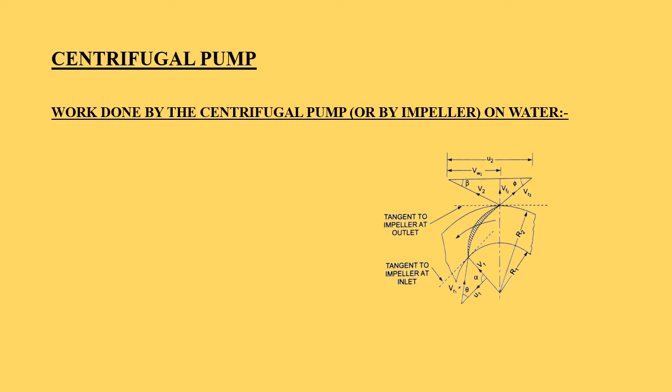In centrifugal pump, work is done by impeller on water. In the figure, N is the speed of impeller in RPM, and D1 is the diameter of impeller at inlet.

U1 is the tangential velocity of impeller at inlet, which is equal to pi D1 N by 60. D2 is the diameter of impeller at the outlet.

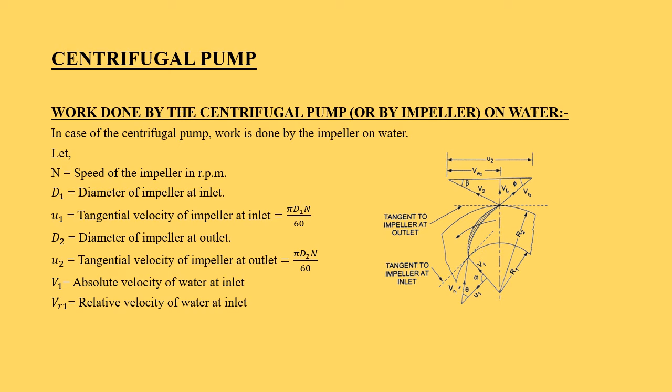U2 is the tangential velocity of impeller at the outlet, equal to pi D2 N by 60. V1 is the absolute velocity of water at inlet, VR1 is the relative velocity of water at inlet. Alpha is the angle made by V1 at inlet with the direction of motion of the vane, and Theta is the angle made by VR1 at inlet with the direction of motion of the vane. V2, VR2, beta, phi are the corresponding values at the outlet.

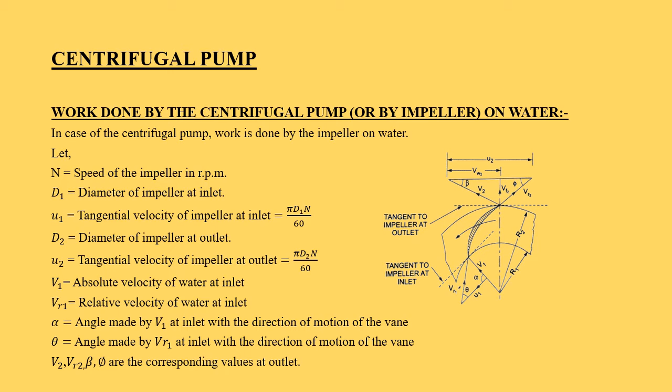In centrifugal pump, water enters the impeller radially at inlet. That is, the absolute velocity of water at the inlet makes an angle of 90 degrees with the direction of motion of the impeller. The work done by the impeller on the water per second per unit weight of water striking per second is

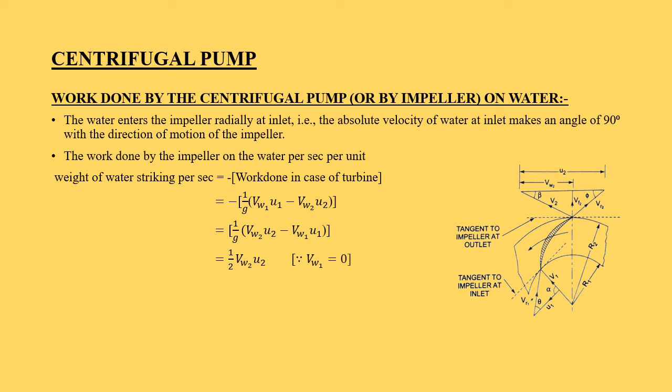equal to minus the work done in case of turbine. So we can write that as minus 1 by G, Vw1 U1 minus Vw2 U2. By rewriting the equation, we can write it as 1 by G, Vw2 U2 minus Vw1 U1, which is equal to 1 by G, Vw2 U2, since Vw1 is equal to 0.

Work done by the impeller on water per second is equal to W by G, Vw2 into U2, where W is the weight of water, which is equal to rho G into Q, where Q is the volume of water, which is equal to area into velocity of flow.

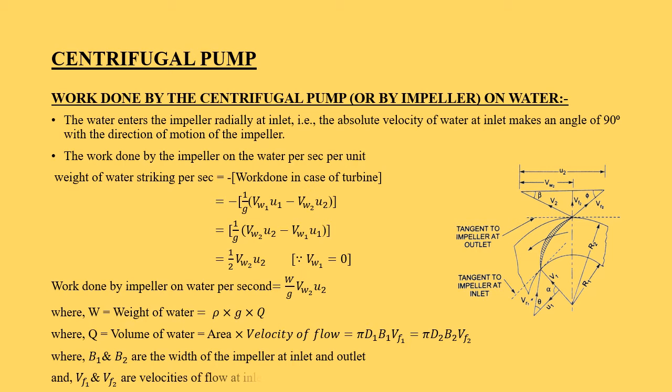So instead of area, we can write pi d1 b1, and instead of velocity of flow, we can write vf1. So the equation becomes pi d1 b1 into vf1, which is equal to pi d2 b2 into vf2, where b1 and b2 are the width of impeller at inlet and outlet, and vf1 and vf2 are the velocities of flow at inlet and outlet.

Suction head of a centrifugal pump is the head required to cause the suction of a liquid from the sump to the impeller through a given suction lift.

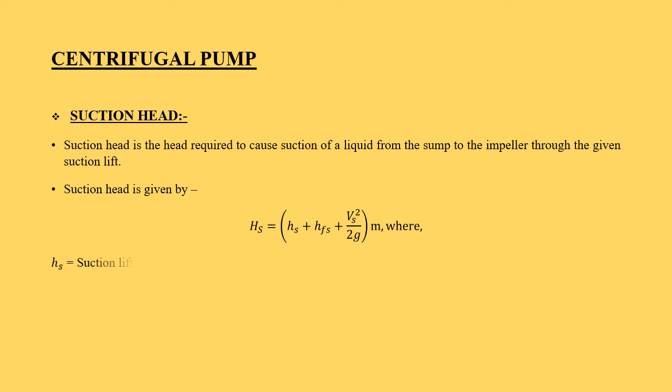Suction head can be given by capital HS, which represents the suction head, is equal to small hs plus small hfs plus Vs square by 2g meter, where small hs is the suction lift in meter, small hfs is the head lost in friction in the suction pipe in meter, Vs is the velocity of flow in meter per second through the suction pipe, and Vs square by 2g is the kinetic head in the suction pipe required to cause the flow through the suction pipe.

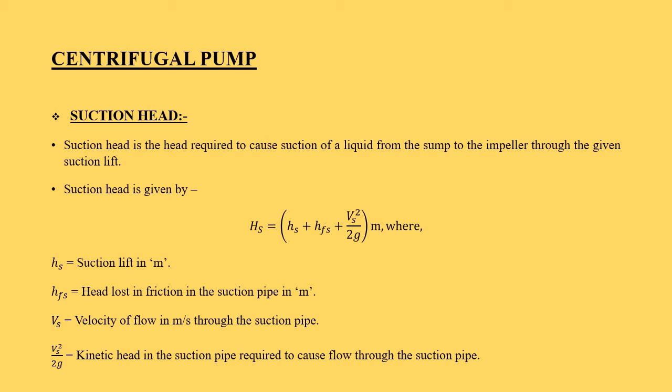Delivery head is the head required to cause the delivery of liquid from the center of the impeller through a given delivery lift.

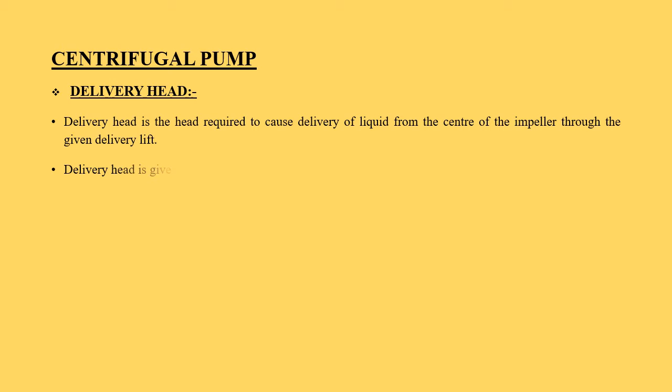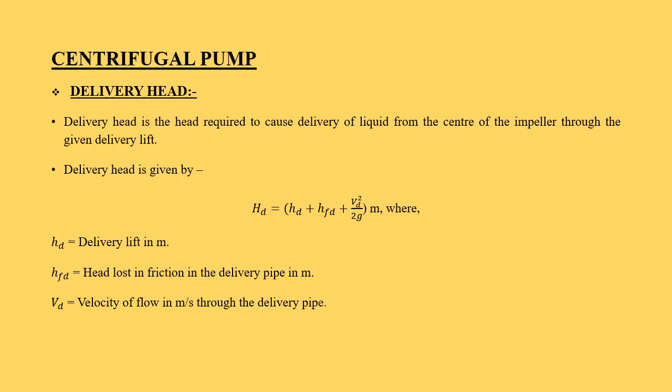Delivery head is given by capital HD, which represents the delivery head, is equal to small hd plus small hfd plus Vd square by 2g meter, where small hd is the delivery lift in meter, small hfd is the head lost in friction in the delivery pipe in meter, Vd is the velocity of flow in meter per second through the delivery pipe, and Vd square by 2g is the kinetic head in the delivery pipe required to cause the flow through the delivery pipe.

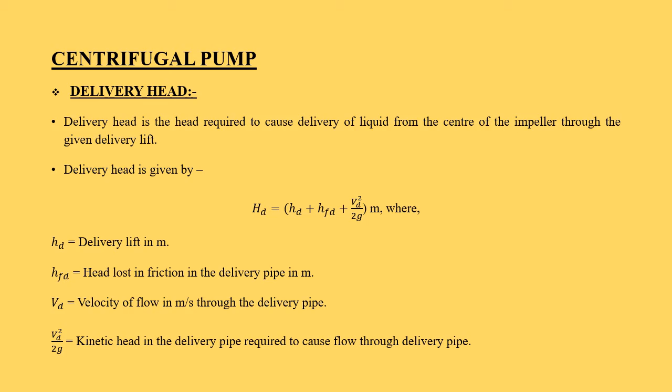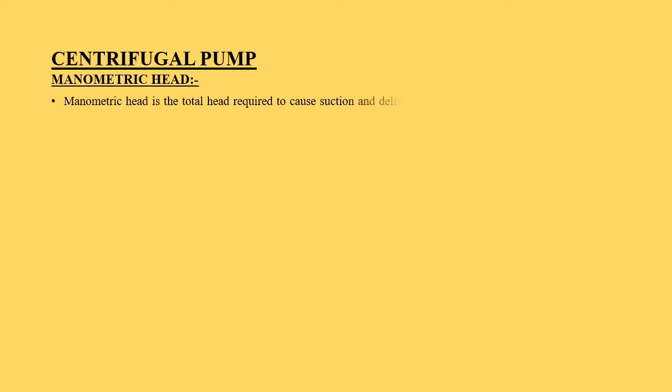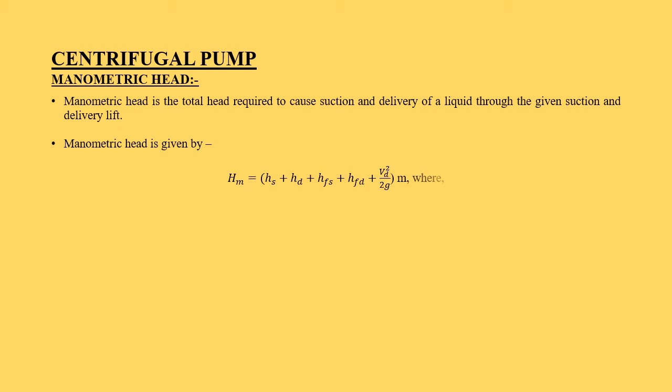Manometric head is the total head required to cause the suction and the delivery of liquid through the given suction and delivery lift. Thus, the manometric head is given by capital HM is equal to small hs plus small hd plus small hfs plus small hfd plus Vd square by 2g meter, where small hs is the suction lift in meter, small hd is the delivery lift in meter, small hfs is the head lost in friction in the suction pipe in meter.

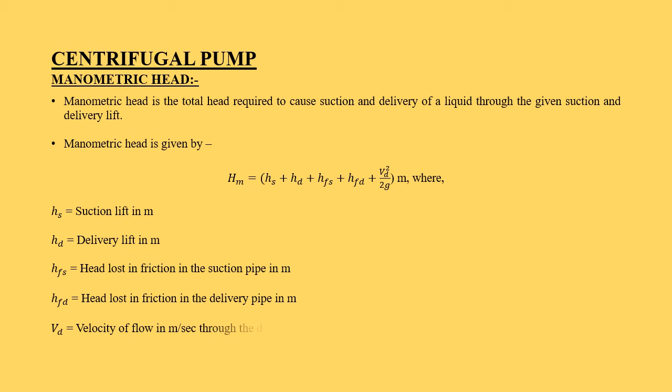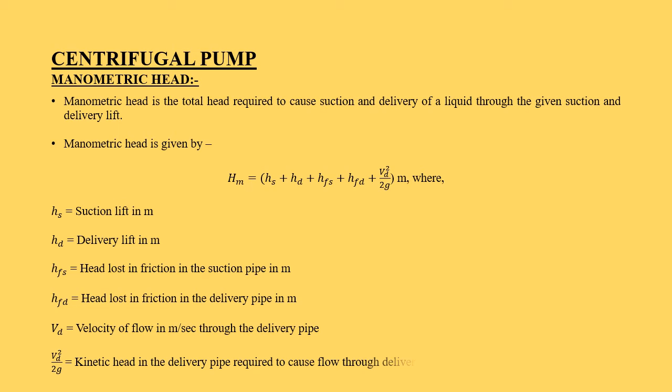Small hfd is the head lost in friction in the delivery pipe in meter. Vd is the velocity of flow in meter per second through the delivery pipe, and Vd square by 2g is the kinetic head in the delivery pipe required to cause the flow through the delivery pipe.

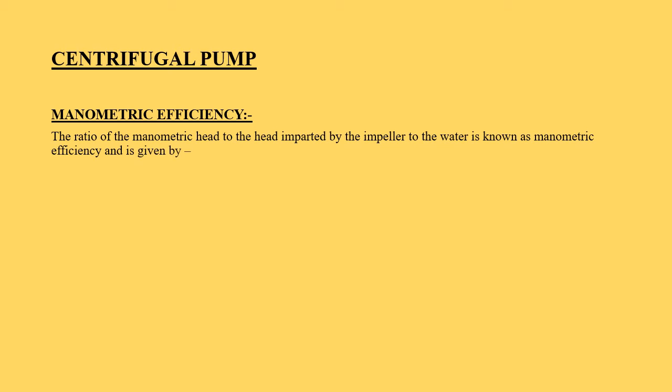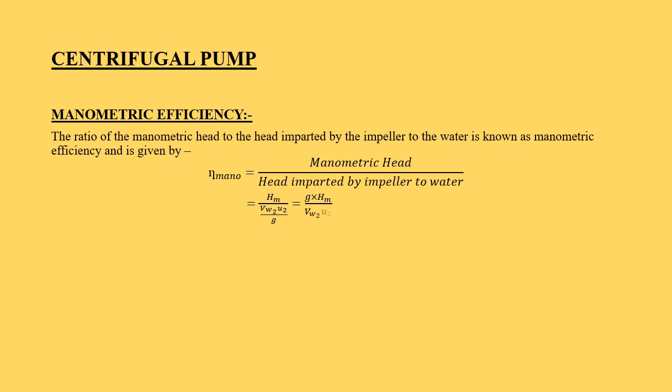Manometric efficiency of a centrifugal pump is the ratio of manometric head to the head imparted by the impeller to the water. It is given by eta mano equals manometric head divided by head imparted by impeller to water. Instead of manometric head, we write Hm, and head imparted by impeller to water is Vw2 U2 by G, so eta mano equals G into Hm divided by Vw2 U2, where Vw2 is the velocity of whirl at the outlet in meter per second.

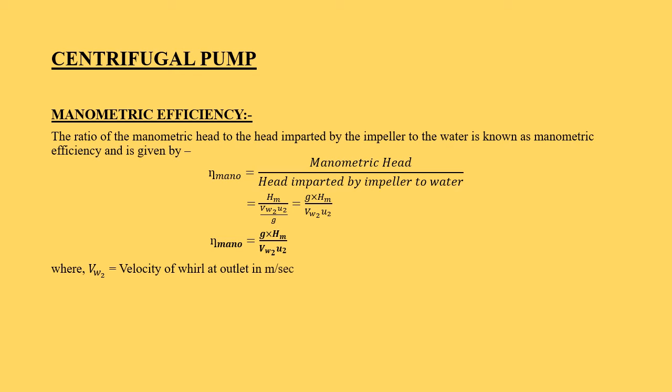Mechanical efficiency of a centrifugal pump is the ratio of the power available at the impeller to the power at the shaft of the pump.

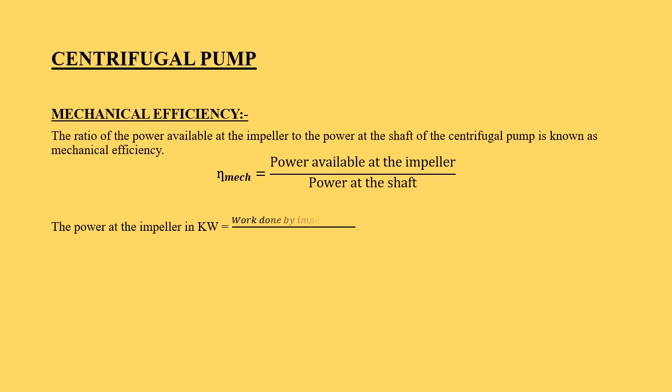The mechanical efficiency, denoted eta mech, equals power available at the impeller divided by power at the shaft. The power at the impeller in kilowatt equals work done by impeller per second divided by 1000. Since work done by impeller per second equals W by G into Vw2 into U2, the power at the impeller in kilowatt becomes W by G into Vw2 into U2 divided by 1000. So the expression of eta mech becomes W by G into Vw2 into U2 divided by 1000, divided by shaft power.

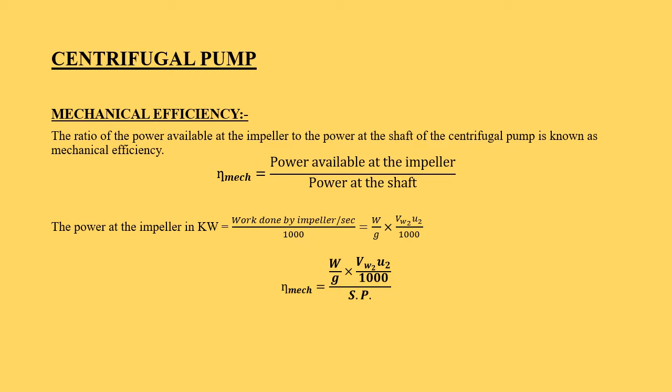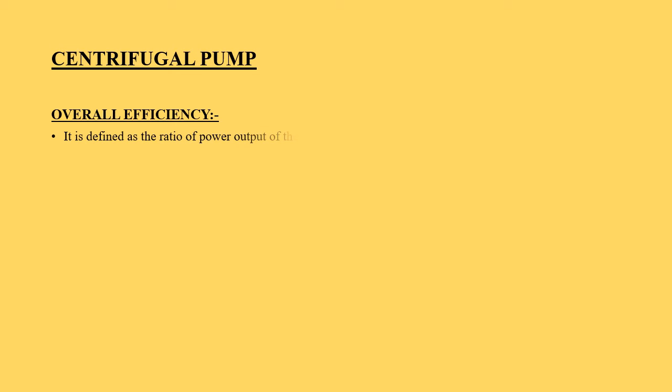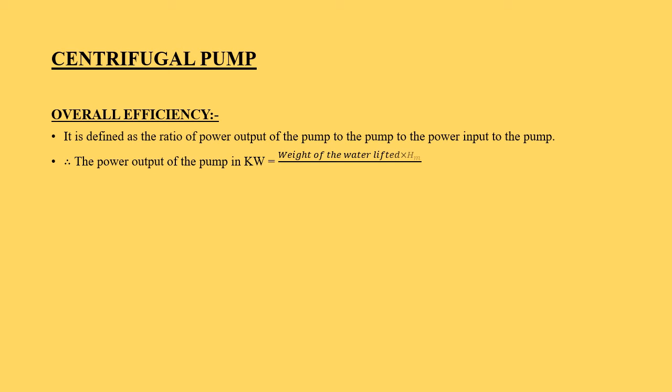Overall efficiency of a centrifugal pump is the ratio of power output of the pump to the power input to the pump. The power output of the pump in kilowatt equals weight of the water lifted into Hm divided by 1000, which can be written as W into Hm by 1000, where W is the weight of water lifted. The power input to the pump equals the power supplied by the electric motor, which is the shaft power of the pump. So the expression of overall efficiency, denoted eta O, becomes W into Hm by 1000 divided by shaft power.

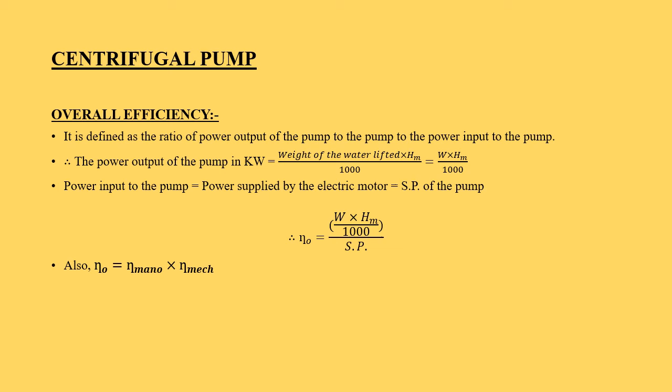Also, overall efficiency is equal to eta mano into eta mech. That is, the overall efficiency equals manometric efficiency into mechanical efficiency.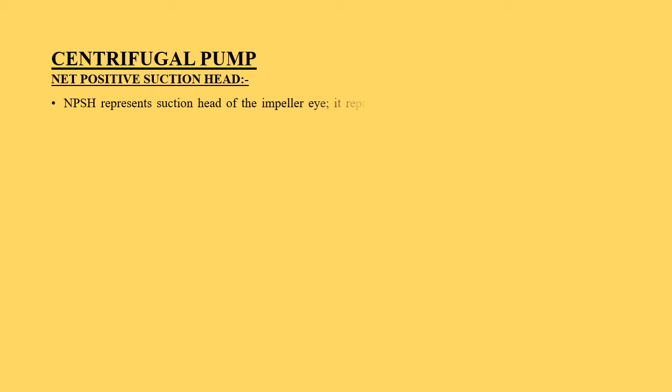The net positive suction head, in short NPSH, represents the suction head of the impeller. Actually, the net positive suction head is the head required to make the liquid flow from the suction pipe to the pump impeller. For smooth and cavitation-free operation of the pump, NPSH should have such a value that the flowing liquid does not boil under the reduced pressure.

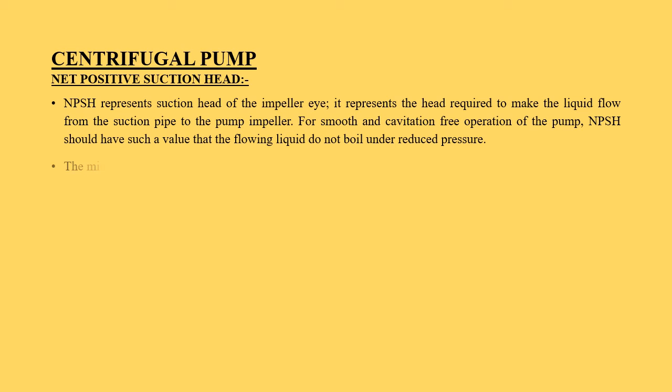The minimum suction conditions are more frequently specified in NPSH, and it represents a combination of various heads. NPSH is equal to the absolute pressure head at inlet of the pump minus the vapor pressure of liquid being pumped, plus the velocity head in the suction pipe.

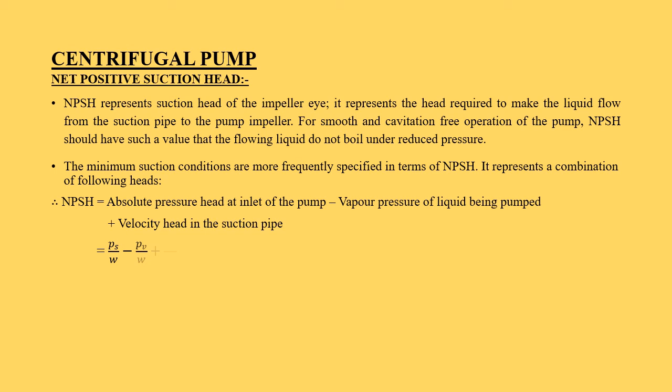For absolute pressure head at inlet of pump, we write PS by W; for vapor pressure of liquid being pumped, PV by W; and for velocity head in the suction pipe, VS square by 2G. Rewriting the equation: PA by W minus VS square by 2G plus HS plus HFS, for absolute pressure head at the inlet of the pump, minus PV by W plus VS square by 2G, where PA is the atmospheric pressure on the surface of the liquid in the suction well.

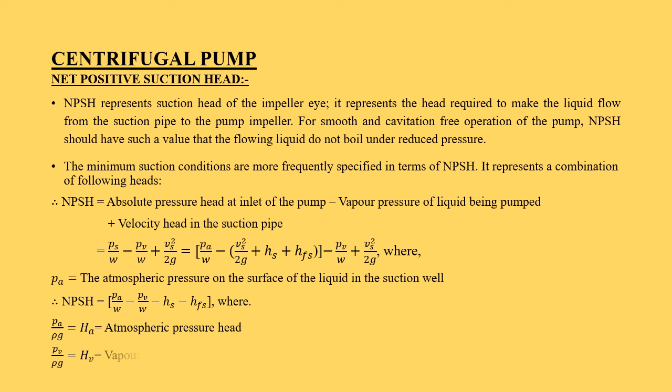So we can write that NPSH equals PA by W minus PV by W minus HS minus HFS, where PA by W, or PA by rho g, equals capital HA, the atmospheric pressure head, and PV by rho g equals capital HV, the vapor pressure head.